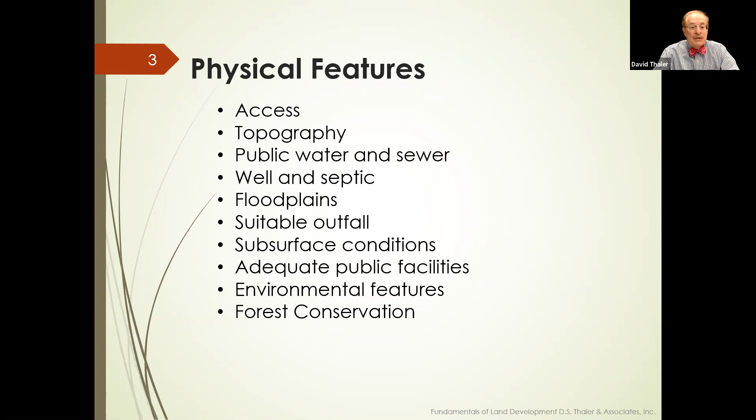Now we will continue to use the Helfrich property here in Woodlawn near our office as a case study, much like we did last week. It's a very simple piece of property, but it has some interesting lessons associated with it. And you'll recall it's 13 acres. It's a rental townhouse community, but we're going to analyze it as if it were for sale. Now really the first issue to consider in any land development project is access, which is a fundamental component of whether land is developable.

While it's extremely unusual to find a property that's completely landlocked, that does not mean that access for development purposes can always be provided. The existing access to a parcel may be too narrow, it may be an easement or a prescriptive right instead of a fee, or it may be unsuitably located.

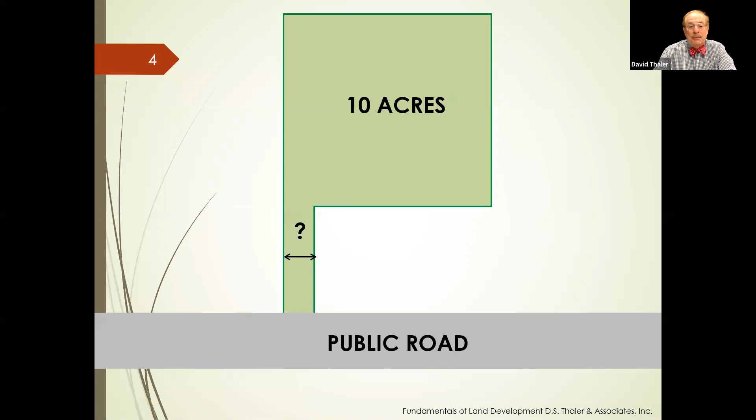In order to provide access to lots, in most cases a public road must be constructed and dedicated, though occasionally development upon private roads in certain jurisdictions is sometimes permitted. Most jurisdictions require a minimum right-of-way width of at least 40 to 60 feet, some even more for public roads, but often there must be additional property available for the grading of supporting slopes.

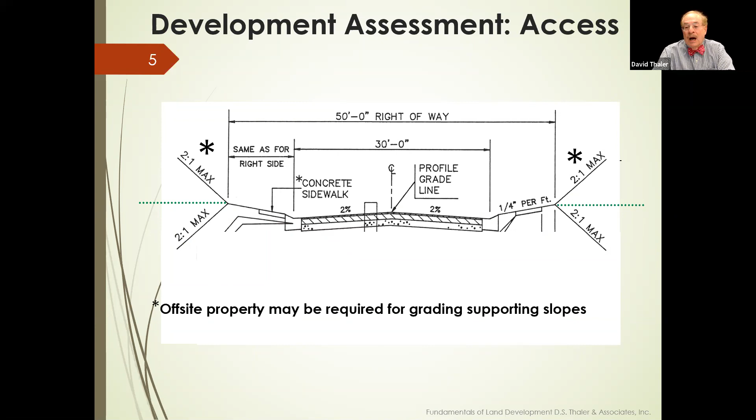If an access of sufficient width cannot be provided, the property may be unable to be developed. And while the public has the right of eminent domain using its condemnation power, the public cannot acquire property for private uses. Therefore, if grading rights on offsite property cannot be obtained, then a property may not be able to be developed.

The transportation article of the Annotated Code of Maryland grants the State Highway Administration control over access upon state highways. Except for restricted access highways, the state cannot totally prohibit access from a state road to a property, but it can control the location and type of entrance. That is, it may only allow a limited access entrance.

The access requirements of the state, as well as the local jurisdiction, can severely impact the development potential and therefore the value of the property. If the State Highway Administration finds the access onto a state highway unacceptable for a full entrance, it may require an entrance which allows only limited turning movements, such as a right turn in or a right turn out.

Such an entrance can be devastating for commercial properties. If you're a Dunkin' Donuts, for instance, you want to be on the going to work side of the road and not the coming home from work side. And it could be devastating for any property, for that matter, which requires access from more than one direction.

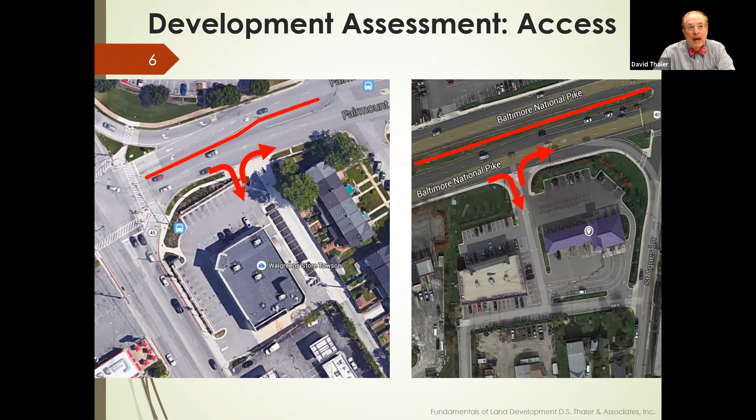That is, entrances should be 100 feet apart from each other if they're not directly opposite. That distance is necessary to prevent confusion as to who has the right of way when the entrances are opposing. In addition, entrance locations are also constrained by what is known as sight distance.

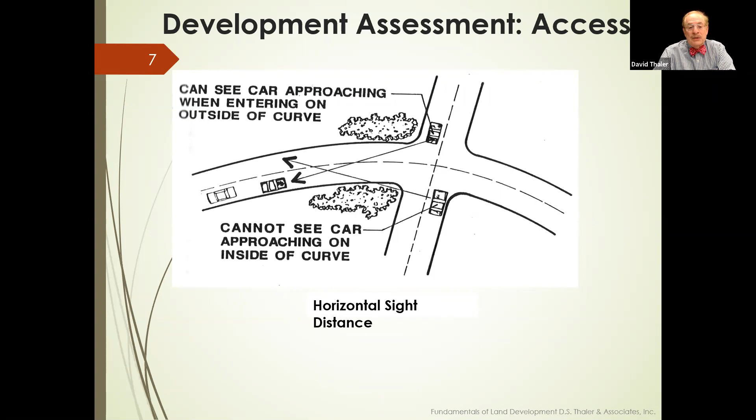That's S-I-G-H-T, not S-I-T-E. Sight distance may either be horizontal or vertical, and an entrance to a highway which is on the inside of a curve may limit the distance around the curve from which oncoming vehicles can be seen. The higher the design speed of the road, the greater the distance must be to provide for a safe entrance location.

Now, there is intersection sight distance and there is stopping sight distance. We usually consider intersection sight distance, which I just talked about, but stopping sight distance comes up, though that's too technical for today's talk and is the subject of another talk.

Likewise, there is another situation that is frequently encountered: entrances which are just over the crest of a hill do not have sufficient vertical sight distance to see traffic approaching from the far side of the hill. The higher the design speed of the road, the greater the vertical sight distance must be for a safe entrance location. In the vertical situation, it's best to be either at the crest of the hill or sufficiently away from the crest.

The two situations of which to be especially aware are when a property's entrance is either close to the crest of a hill or on the inside of a curve. It's possible, as we have hit before, that properties with extensive road frontage can be so affected by sight distance and other regulations that no safe entrance can be provided.

In that circumstance, the property could be undevelopable, or its development potential could be restricted, unless a suitable entrance location can be provided. Now, in Maryland, representatives of the State Highway Administration are assigned to local jurisdictions, and it's recommended that the SHA representatives be consulted and that they review the suitability of an entrance location prior to an investment decision.

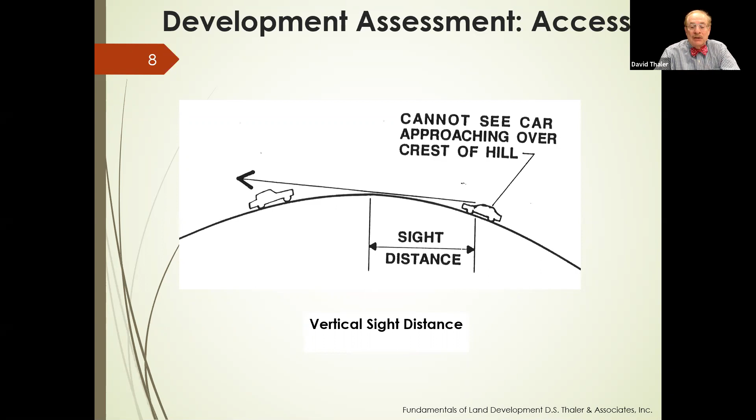As a very general rule, the sight distance is 100 plus 10 times the design speed of the road. So if, for instance, the road has a design speed of 35 miles an hour, the required sight distance would be on the order of 450 feet. Most jurisdictions, however, follow the AASHTO standards, the American Association of State Highway and Transportation Officials.

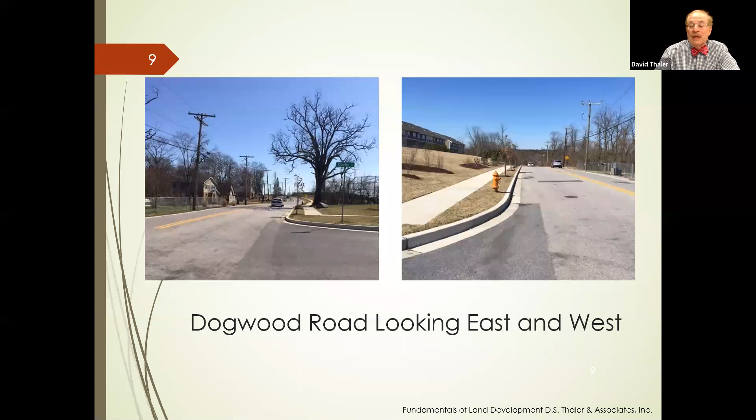Now, going to our example, the Helfrich property is located on Dogwood Road. The slide to the left is looking to the right coming out of the entrance, and the slide to the right is looking to the left coming out of the entrance. You can see that this is a pretty hilly road, but the crest of both hills are sufficiently far away from the entrance, so it would be safe to have a full, unrestricted entrance here. Even in an obvious case like this, it would still be best to have one of the county public works engineers come out and double check.

Now, the next element that is critical to determining development potential is topography.

Topographical maps and so-called GIS tiles are usually available through the individual jurisdictions, and very often GIS is now available on the internet. In areas where the maps or tiles are not available, USGS maps showing topography with large contour intervals can be used to develop an understanding of the existing topography on a property.

A property may have portions that are too steep to be properly served by roads or driveways, and areas that are too steep are difficult to build upon at best and may be completely unsuitable for construction. Existing site topography often guides the design location of proposed roads and improvements.

Normally roads must be graded at less than 10%, although the optimum grade for a road is usually between 2% and 8%, though there are exceptions. Grade, of course, is the change in elevation over a horizontal run expressed as a percent. 5 feet of rise along 100 feet of run, for example, is a 5% grade.

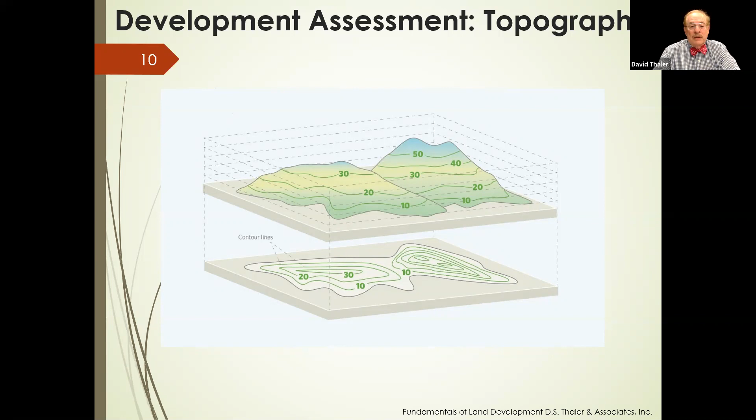Now, Helfrich, our example, is pretty flat. However, it does have a very interesting feature — a beautiful pond full of fish. I took the director of planning out here, and we caught quite a few fish. This would be very hard to appreciate just from the GIS; you would need to see it in the field.

And interestingly, even though it's a wonderful amenity, and we were able to save it, under then-existing county regulations, you couldn't count it towards your open space requirement because it's not dry, and you couldn't use it for stormwater management because the outfall and release rates weren't engineered. But we were a little bit unusually able to save this as an amenity.

Now, also on the Helfrich property, it is very flat, and it's so flat, it's suspiciously so, and it didn't smell right to me, and that raised a red flag, but we'll get to that in a few moments.

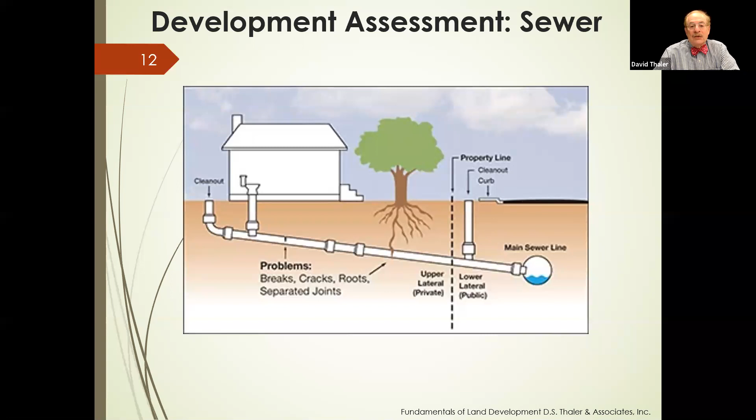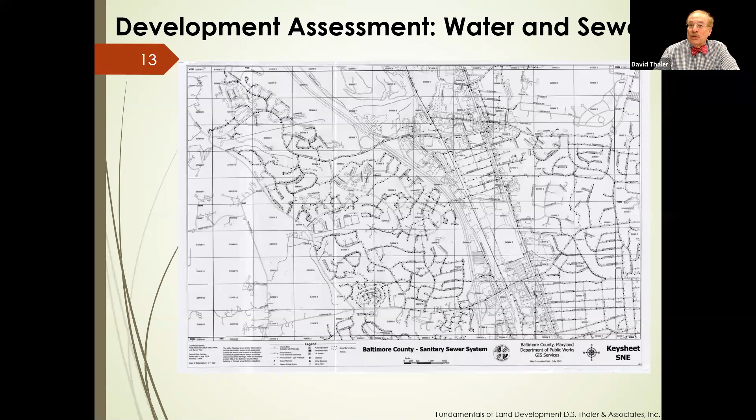Now, if the sewer is existing in your area, you must also determine if it's physically possible to extend the lines to the site. Sewerage usually flows by gravity, and therefore there must be sufficient fall between your site and the existing sewer for the system to really work. And in addition, there must be adequate right-of-way available for the construction of any required extensions.

Now, coming back to our Helfrich property, our case study, this one is a wee bit unusual. There is sewer really nearby. It's right at the top of the hill I showed you in the prior slide, but it's too high and the sewerage must be pumped. And in Baltimore County, there are two options: you could have a public pumping station or grinder pumps.

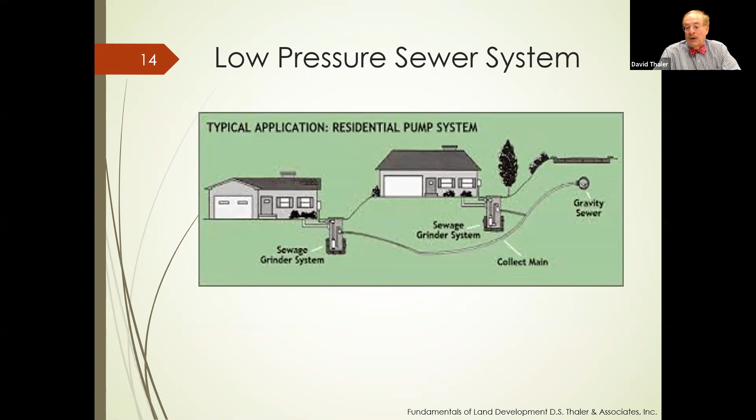Now, because these were actually rental townhomes, it would have been possible to install a private pumping station. A public pumping station would cost something on the order of $1 million, sometimes more, and is required, at least in Baltimore County, if there are more than 100 units using it. But for less than 100 units, the county will permit what are known as grinder pumps, which is the option we selected in this particular case.

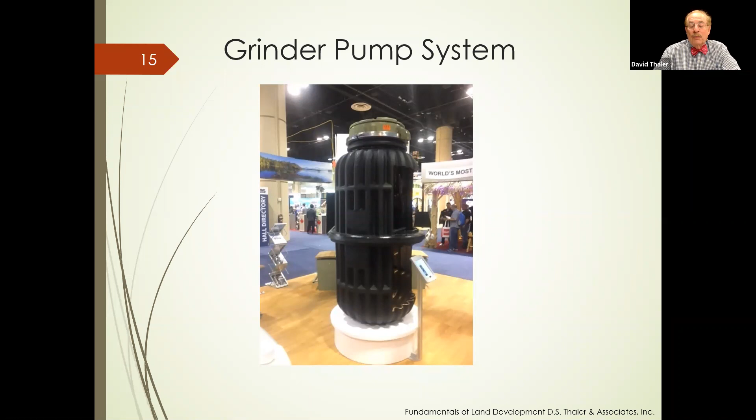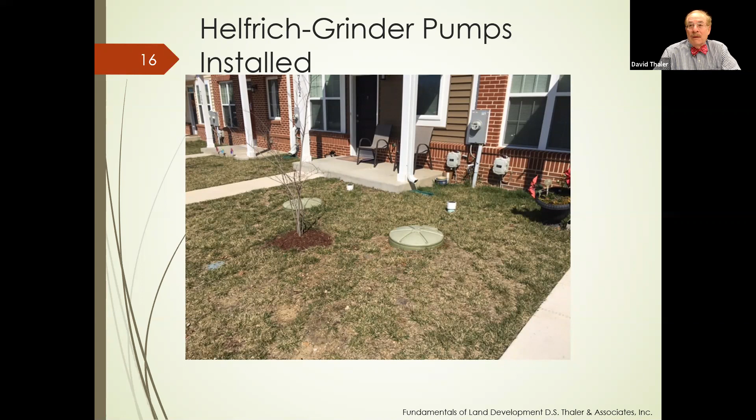They do change the financial relations between the developer and the builder, however, because the developer typically puts in the casing and the force main, and the builder ties in the pump to the house and installs the pump itself.

Now, the next element of important feasibility is water supply. Unlike sewer systems, water systems flow under pressure and not by gravity, and consequently, under most circumstances, water lines can be extended with little concern for grade.

Again, county records or GIS can help determine if water lines are proximate to your property, but I always like to visit the site and check for fire hydrants. If you don't take anything else away from this talk, I think it's very important in doing a feasibility study to get all the public records and then physically go out to the site, and you will find errors and things that aren't on the records.

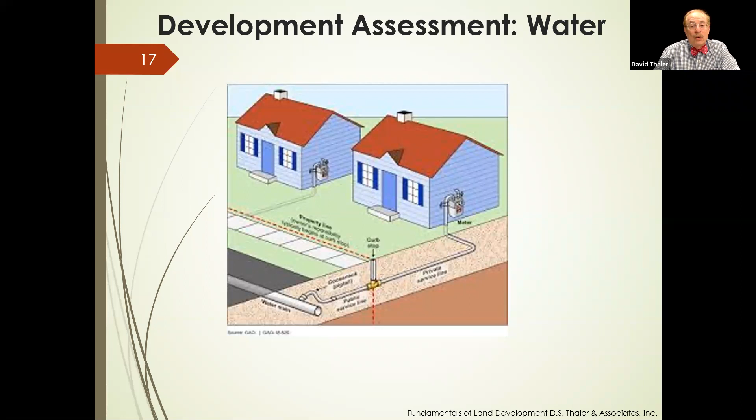Now, water lines have their own problem associated with them because they're, especially the older ones, generally made of cast iron, and they tend to rust or tuberculate with age. It's very common for old water lines after 50 years or so to have limited flow capacity. And so you conduct what's called a fire flow test to determine if the water line has sufficient flow for a particular development. Multifamily developments require more water pressure and more water volume than do single family.

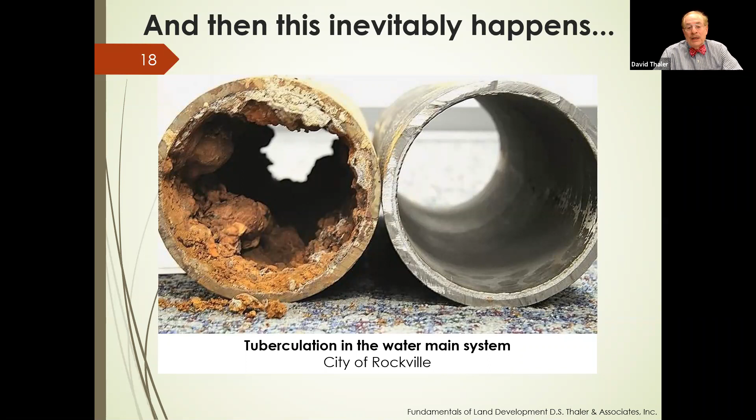Now, occasionally there are entire areas which are subject to low water pressure, and these areas are generally mapped in the local public works department, and development may be prohibited or restricted until water service can be made adequate. And in order to physically have a property with public water and sewerage, it must be properly designated within the state-approved master water and sewerage plan, and in the Baltimore region, within the metropolitan district.

Areas not served by public water and sewer typically utilize well and septic systems. In the coastal plain of Maryland, water yields are typically very high. However, in the Piedmont area, there are many geological formations which produce low water yields. It's possible a site may not yield a producing well at all. We've had lots with a dozen dry holes on them, for example.

An examination of the geological maps prepared by the Maryland Geological Survey can provide some insight into the geological state of the property, but ultimately a well test and the records at the county health department are the only things that will really determine an actual yield.

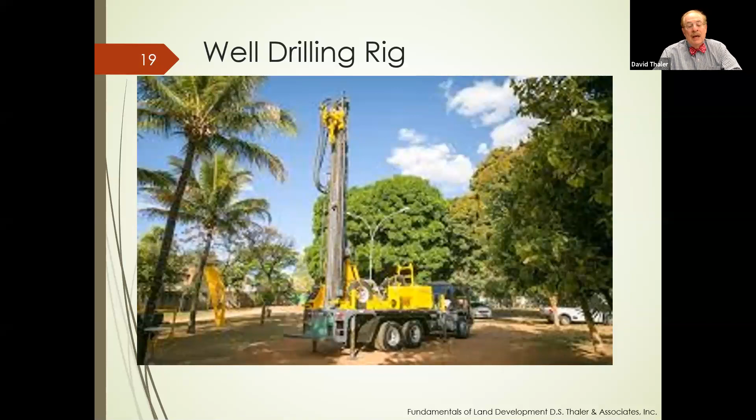Likewise, percolation tests should be taken to determine the suitability of a site for septic systems. A percolation test is conducted below the level of the septic tank. A hole is dug, water is poured into it, and the rate of outflow is measured. The percolation rate must be neither too fast, or the soil provides no filtrative capacity, nor too slow, or the septic tank will overflow, for the property to be deemed suitable.

Properties at low elevations near streams or tidal areas, or which have very poor drainage, will not be suitable for septic systems. Every county in the state has a health department responsible for the approval of building sites.

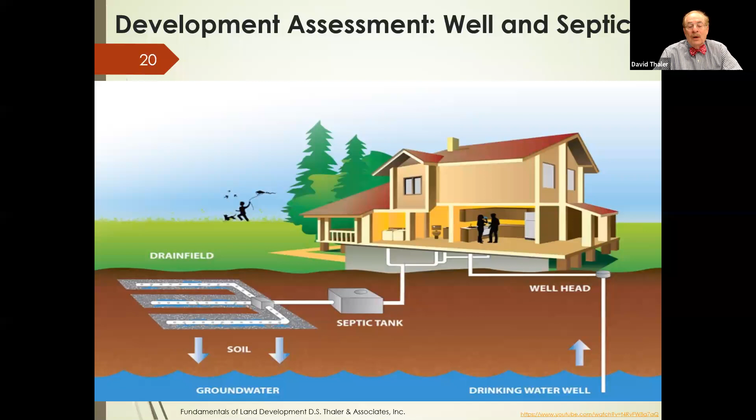Percolation tests must be taken and approved prior to the recordation of a plat. The Sustainable Growth and Agricultural Preservation Act of 2012, relatively new Maryland legislation, severely limits the use of septic tanks, and when they are permitted, they must use the best available technology, which is considerably more expensive than septic tanks without that technology.

The next element to consider is watercourses and floodplains. A stream may be a very attractive feature for development from a marketing point of view, but with every stream there's typically an associated floodplain, which is the area inundated in a given rainstorm. Floodplains are regulated, and largely all construction is prohibited within the 100-year floodplain, which is typically the standard storm.

The state of Maryland requires a permit for construction in most floodplains and will issue the permit if the pre-development hydraulic characteristics are maintained, but that's very difficult to get. Even if floodplains were not regulated, construction in them is extremely ill-advised, especially with global warming, because any improvement within the floodplain is at risk of inundation.

The 100-year storm is currently the accepted design storm, and it refers statistically to the storm which has a 1% chance of occurring in any given year. This statistical relationship also applies to other storm frequencies. For instance, a 10-year storm has a 10% chance of occurring in any given year, and a 2-year storm has a 50% chance of occurring in any given year.

Civil engineers and hydrologists use computer modeling to determine the floodplain. The amount of runoff at any given point is a function of several factors, including the drainage area coming to the point, the land use characteristics—how much of the site is grassy, forested, or impervious—and the length and slope of the contributing channel, known as the time of concentration, from the highest point in the drainage area to the lowest point. The shorter the distance and the steeper the slopes, the greater the amount of runoff generated in a given storm.

Although only an engineering study can compute the precise location of the floodplain, the Federal Insurance Administration (FIA) of FEMA, the Federal Emergency Management Agency, publishes a series of flood maps which are readily available and give an indication of the major areas which are flood prone and within floodplains. Although the FEMA maps identify major floodplains with pretty good accuracy, they aren't so accurate with smaller tributaries and may not even map the smaller floodplains. So only an engineered floodplain study can really correctly determine floodplain limits and elevations.

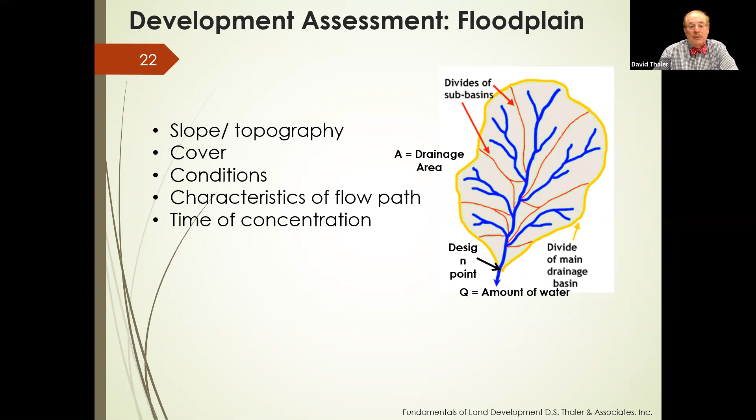No matter how attractive a property may look on the surface, its subsurface conditions may render it inappropriate for development.

Soil maps, which identify various soils and their development limitations, are available from the USDA Natural Resources Conservation Service. Now, a site may be underlain by impenetrable rock or have an extremely high water table, or it may have been used for dumping. This is extremely common.

Subsurface explorations, either soil borings or test pits, should always be undertaken to determine the nature and suitability of the substrata. Borings can be prepared or test pits excavated with a backhoe at strategic locations very economically, but more than one developer has purchased property to discover trash buried beneath the surface.

Now, as I alluded to before, Helfrich was an old country club, and there's a series of soccer fields on it, and it just didn't look right to me. After as much time as I've spent in this business, I can just walk a site and sometimes things just don't feel right. This site was in a hilly area and it just looked too flat.

So we went out and we got a backhoe, $60 an hour or something like that, and we started digging some test pits. And sure enough, it was underlain by trash and rubble. Apparently, when one of the highways was being built, the owner of the property allowed them to dump the rubble on the site, then covered it up, made a very attractive field with it.

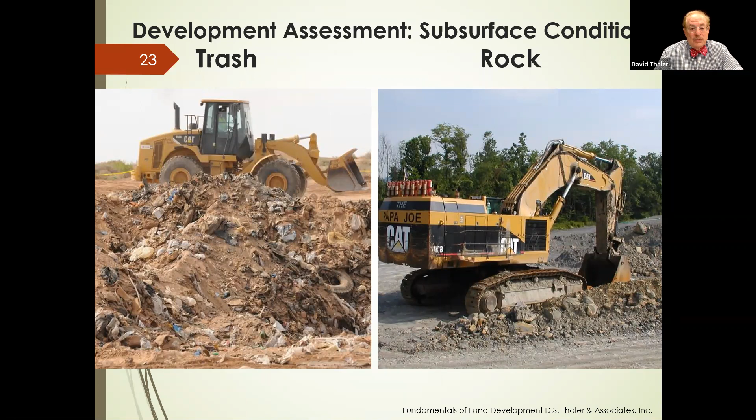But had the developer bought this property not knowing the trash was there, he would have been in for a big financial surprise, especially if that had been considered toxic and hazardous waste or had petroleum products associated with it. Now, the next element to talk about is suitable outfall.

Every site must discharge its water in a way that does not damage the downstream property. And in order to do so, it needs what is termed a suitable outfall, which is very hard to define. But as Supreme Court Justice Potter Stewart once said in a very different context, you know it when you see it. He was talking about pornography, incidentally. A suitable outfall, you know it when you see it.

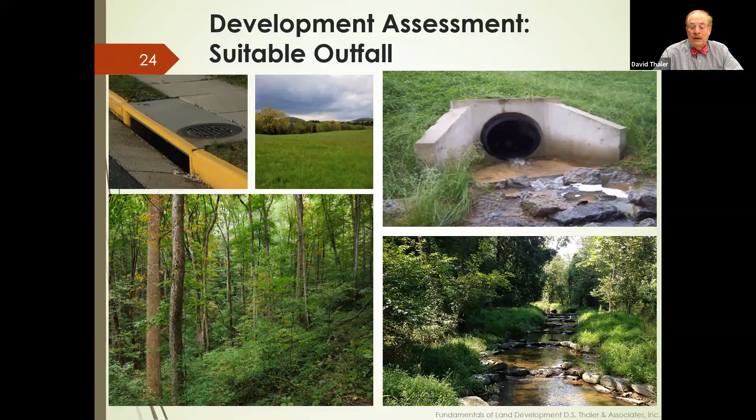The next element is adequate public facilities, which many jurisdictions in Maryland have, Baltimore County, Anne Arundel County, and many others. These prohibit development in those areas where certain public facilities are inadequate. In Baltimore County, the County Council adopts maps of the basic services in the fall of every year. The services they map are traffic, sewage, water, and schools. Areas of deficient services are mapped and development is prohibited in them for the duration of the deficiency.

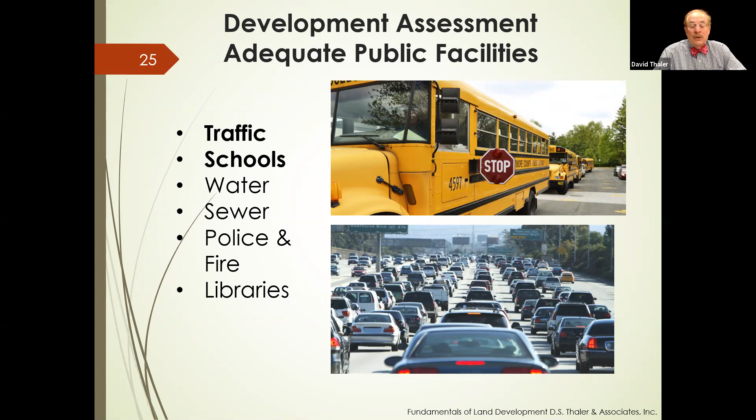In Anne Arundel County, a development proposal must also have adequate public facilities, including schools, traffic, water and sewer, and police and fire. A development in an area of inadequate facilities can proceed only if the developer corrects the inadequacy. Now, Montgomery County, interestingly, has had APFO, adequate facilities, for years, and APFO-driven moratoria, but just eliminated its moratoria for overcrowded schools, having found that it didn't work and didn't solve their overcrowded school problem. But adequate facilities are something to be considered in every jurisdiction and are usually well mapped.

The next element is critical area. The Maryland legislature adopted Section 8-1801, the critical area law, and this divided areas in the state into three types of development areas: intensely developed areas, IDA, limited development areas, LDA, and resource conservation areas. Suffice it to say that there are very difficult restrictions in each of these areas.

The critical area is the area within 1,000 feet of the Chesapeake Bay or its major tributaries, and it is possible to increase the IDA and LDA, the areas which have some development potential to them, through a process called obtaining growth allocation, but that's difficult and a talk for another day.

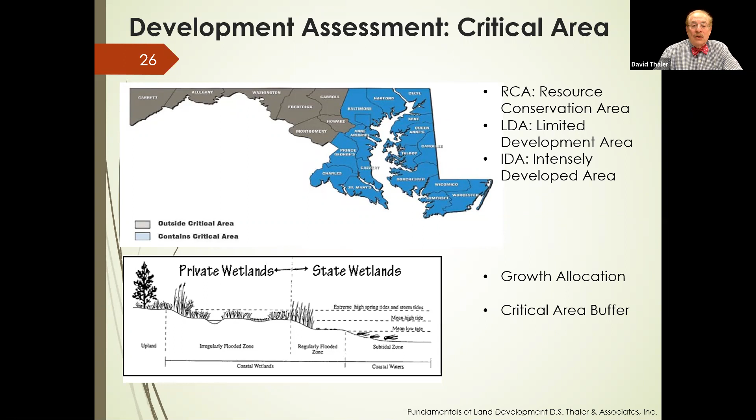I'd like to talk about some environmental issues next. We're going to have on May 18th Michael Powell, a superb environmental lawyer from Gordon Feinblatt, really dig deep into this.

But in the context of feasibility, I want to talk about some environmental issues. The first are toxic and hazardous waste, and there is a law, the Comprehensive Environmental Response Compensation and Liability Act, known as CERCLA, better known as Superfund, which imposes severe liabilities and risk upon real estate owners. CERCLA defines a long list of toxic and hazardous waste, and the act applies to anyone with a contractual relationship to a property. That is, you may not have contaminated property, but if you buy a contaminated property, you are responsible for its cleanup, which can be extremely expensive.

In order to protect property purchasers, a system has evolved, and it is very important to have a phase one environmental assessment performed by a competent environmental consultant. A phase one includes the development history of the property, visual and other analysis to determine if it's likely that toxic and hazardous waste are present. Then if you do a phase one, under the law a property owner can assert the phase one as a defense should environmental liability later arise.

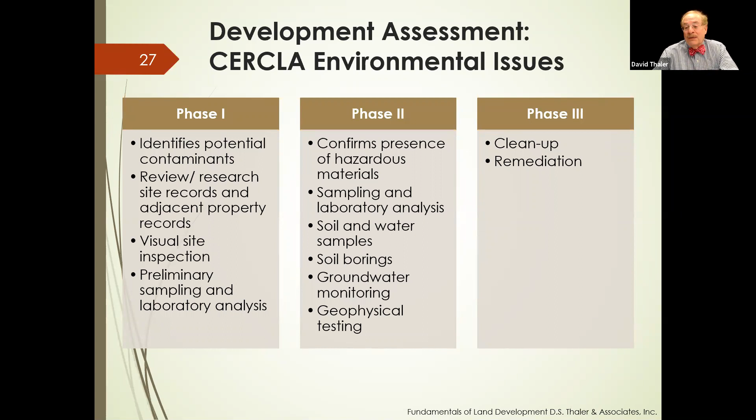In the case of contaminated property, which we call brownfields, there is the availability of the VCP, the Voluntary Cleanup Program at MDE, and that is available, but very expensive and not typically for the development property that we deal with.

Now, the next element to consider is forest conservation. Maryland and various local jurisdictions have passed laws requiring forest conservation. Forest conservation requires first a forest stand delineation, a study to determine the extent and nature of forest resources, and the State Forest Conservation Act maintains that a certain percentage of forests be maintained. This is known as a threshold, and there is a mitigation requirement should clearing be proposed below that threshold.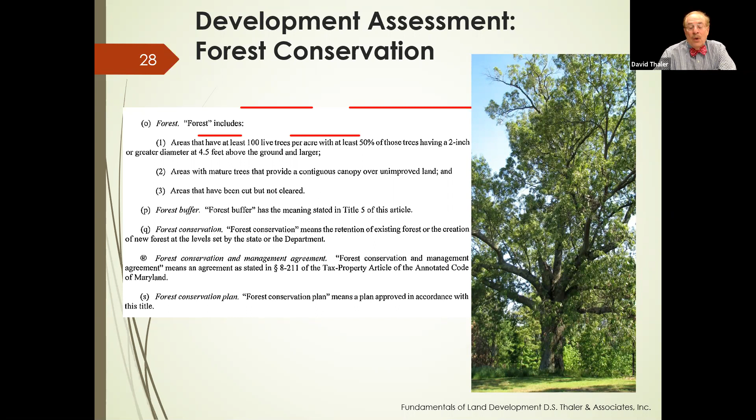There is also what's known as an afforestation requirement, which requires a minimum amount of forest even where there is none initially. In addition, some jurisdictions like Baltimore County have specimen tree ordinances which require the protection of trees of a certain size and sometimes require what Baltimore County calls special variances before their removal.

I want to talk a little bit about wetlands. Wetlands are considered to be highly sensitive and valuable environmental resources. They're classified as tidal or riparian and non-tidal. Typically, development projects encounter riparian or non-tidal wetlands. The Federal Clean Water Act, as well as state and local laws, protect wetlands and provide for very severe penalties if they are disturbed.

Prior to undertaking any development project, if the presence of wetlands is at all suspected, it's highly recommended that a qualified consultant perform a wetlands delineation. And even if the wetlands are not suspected, it's still advisable to have a cursory review.

Under federal regulations, wetlands must have three characteristics, what they call diagnostic parameters: hydrology, hydrophytic vegetation, and hydric soils. These are basically circular definitions. It simply more or less means wet soil. Hydrology means that water is close to the surface for at least 2 weeks during the growing season. There are some types of plants which like to grow, and some which will only grow, in wet areas. These become diagnostic parameters for wetlands, and these are called hydrophytic plants.

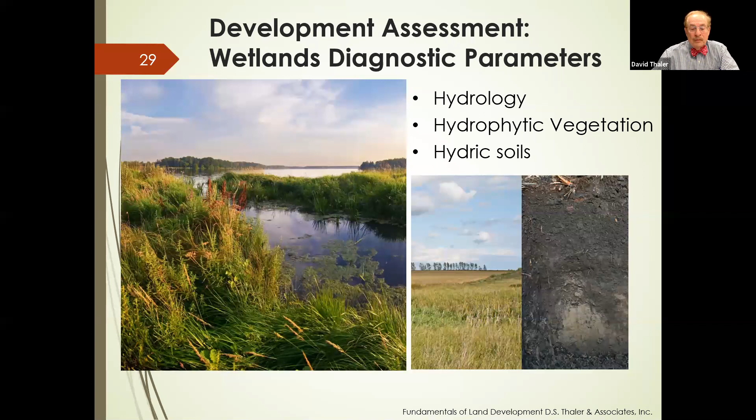Another element to be considered are historical issues, and these can radically affect property development. Among these are grave sites. Historically, backyard burials or burials in small family plots were very common, and these are often unmarked and undocumented. Now, disturbance of graves is really a bad idea and can result in hefty penalties and must be avoided.

But I'll tell you, I've seen the movie Poltergeist, and really, you don't want to mess with the graves. And if you have graves, you want to find them on site before the backhoe operator does to make sure that they are properly protected.

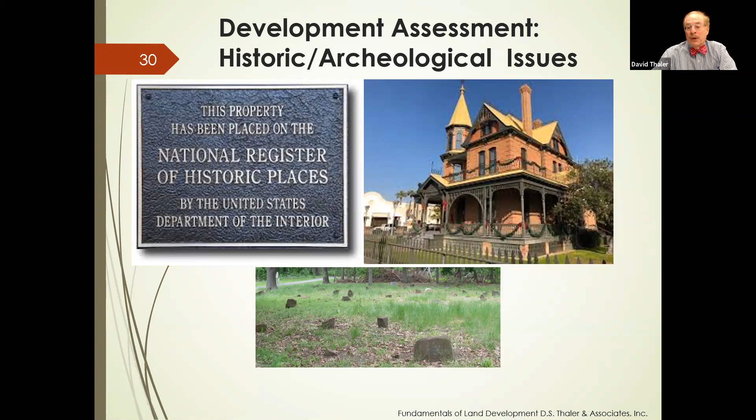Now, additionally, some counties, like Anne Arundel, require an archaeological investigation, and many counties have historic preservation laws which prohibit development on historic sites, generally but not always those that are more than 50 years old. And sometimes development will be prohibited on historic settings as well. Now, most jurisdictions, as well as the state of Maryland, maintain an inventory of historic sites, which should be consulted prior to property purchase and development.

Now, the next issue are title issues. We are encountering these much more frequently. I think that title reports are going back further now than they used to. I think they used to stop at 50 years, but we're coming up with title issues much more frequently than they did. And the first variety is covenants.

Now, it's quite common for a property to be restricted by the use of a covenant. For instance, a covenant may say that future lots have to be a certain minimum size, or may prohibit certain types of construction. Now, covenants are extremely difficult to remove, and it's not uncommon, especially in the Baltimore region, to find covenants against certain religious or racial groups. Those types of covenants, however, are no longer valid.

Another issue we frequently had, very dangerous, are old roads or paper streets. These are more common than you would imagine. And back in the day, surveyors would subdivide property and create streets wherever. Very often they didn't get developed.

But the problem is that every property owner which fronts on the paper street has a non-exclusive right to use that road. So it's very important to know where these paper streets are, even though they may not be visible in the field, and to avoid developing on them, because if a lawsuit is filed, it's been known for the judge to have the house removed.

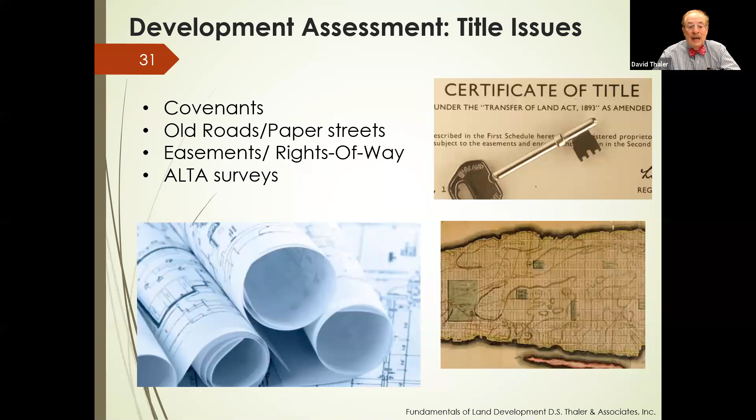It is very important to get good and merchantable title, and therefore I can't recommend enough that a title search be done, not when you close on the property, but as part of the feasibility of the property to see if there are any title issues that would affect your development.

Now, one other unique item to the Helfrich property is that there was a cell tower monopole in the middle of the property. This was obvious, it was here, but it affected the development. Now, monopoles and cell towers are designed not to tip over their whole length. They're designed, when they break, to break in the middle. So they have a designed fall zone. So we had to calculate that designed fall zone and make sure that no houses were within the distance that wasn't safe from the monopole.

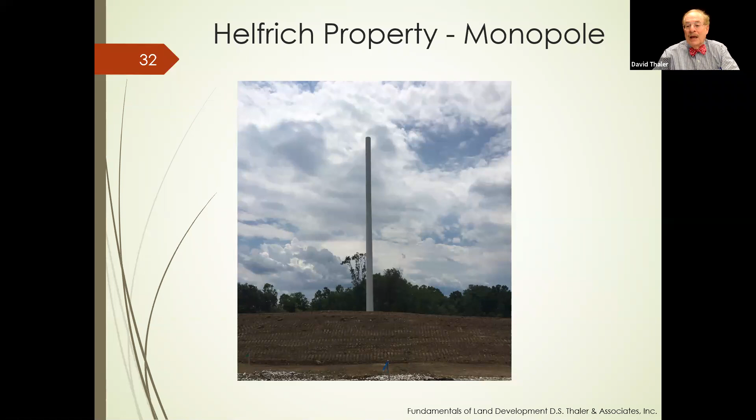And then what we like to do is prepare, during the feasibility, a sort of plat of existing conditions. This is the Helfrich property. It shows the zoning, the topo, the boundary, the wetlands, the forest buffer, the steep slopes, everything that you can think of. I like to put it in a graphic so that we can understand what the issues are and how we're going to deal with them. And then that, of course, leads to the final layout.

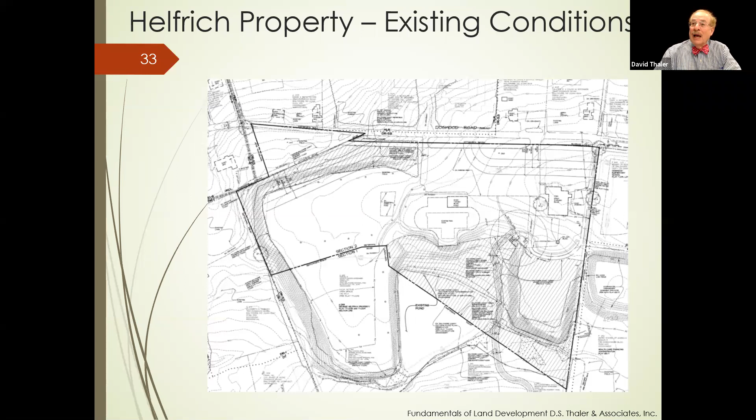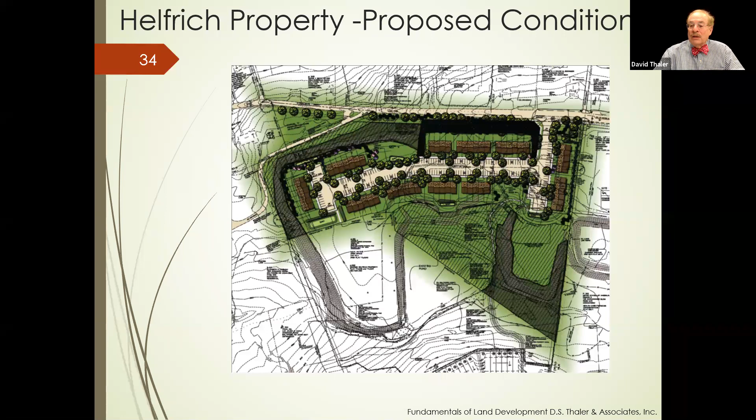I want to talk briefly about the approval process.

Now, when I started work in Pennsylvania, which has more than 2,000 boroughs and townships, I was surprised at how different all the subdivision approval processes seemed to be. But it seemed as if there was some hidden spine to them, because they were all different, but they were all very similar. And it took me a while to figure out why.

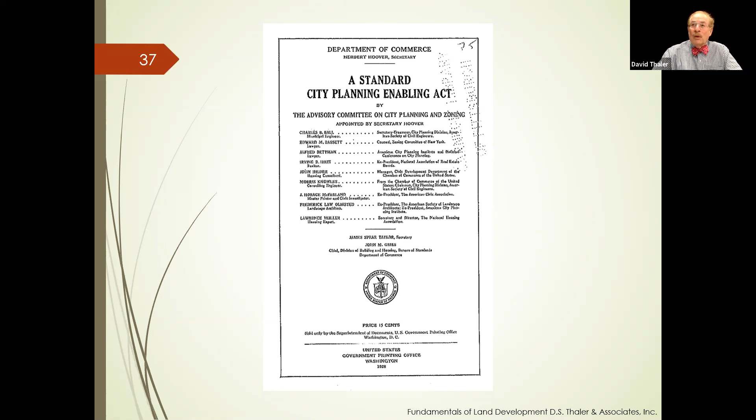And that's because they're all based on this Standard City Planning Enabling Act, which was a model ordinance promulgated by the US Department of Commerce, and it's been adopted in one form or another by almost every American jurisdiction.

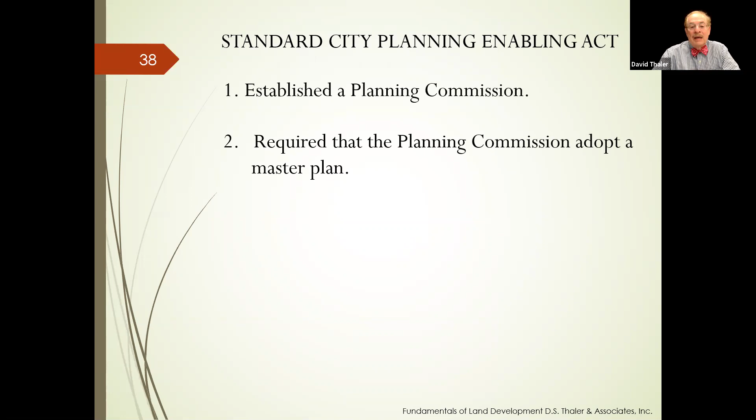Now, the act had several elements to it. First of all, it established a planning commission. It required that the planning commission make and adopt a master plan, and it prohibited the opening of any public roads until their location had been approved by the commission, and it made the subdivision of property illegal without planning commission approval.

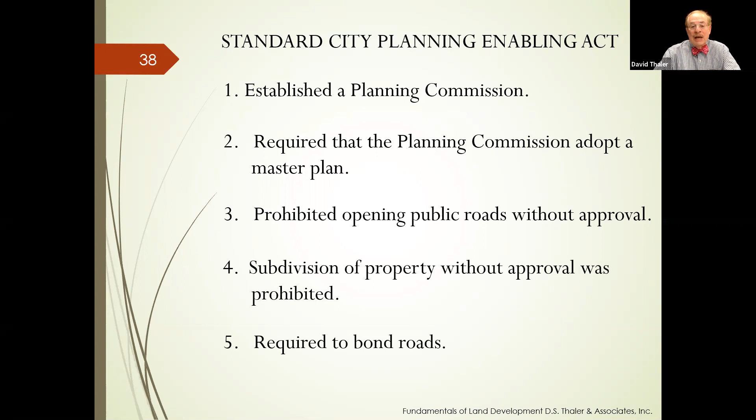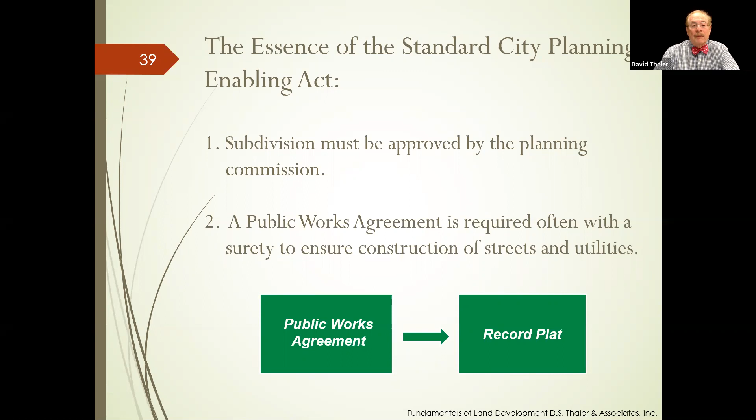Finally, the subdivider was required to bond or otherwise guarantee the construction of the streets, usually with a contract, which came to be known as a public works agreement. And so in its very simplest form, the subdivision process really only consists of two real steps: one is approval by the Planning Commission, and the other is a public works agreement. But from that very simple framework has grown an extremely complex, convoluted process that in some jurisdictions contains more than 100 steps and the involvement of dozens of agencies.

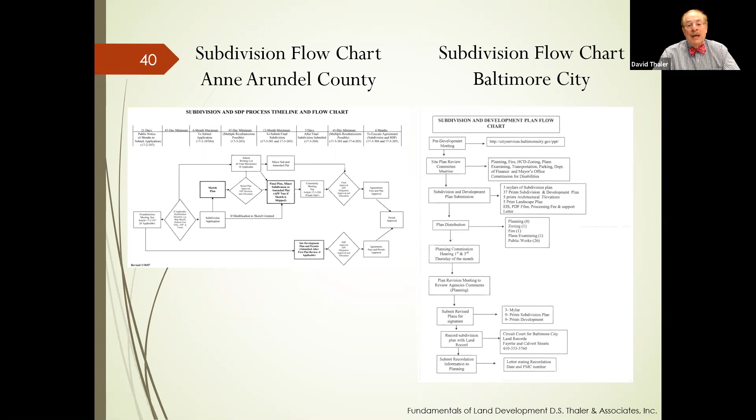Now, here on the slide are the Anne Arundel County and the Baltimore City, somewhat oversimplified flowcharts. Often the authority of the Planning Commission is delegated to the staff, usually the Director of Planning. And because it would be extremely time consuming to submit all the engineering at once for final approval, a multi-step process has evolved. In many jurisdictions, Howard County for example, it's a 3-step process: sketch and final, with an optional pre-sketch submittal. Now, in this region, Baltimore County has arguably the most sophisticated process, and its procedures are often adopted by other jurisdictions. So I'd like to review that one in a little more detail.

Baltimore County divides its process into 2 phases, however our office adds a phase to that we call pre-phase 1. Pre-phase 1 includes gathering all the physical elements and constraints about the property. Generally we do boundary and topographical surveys - we like to do that right up front, even though that's not always necessary. It's possible to work from the GIS, but it sure saves a lot of trouble later. We do the wetland analysis, the forest stand delineation, the floodplain, and other environmental studies so that we completely understand and seek approval where necessary of the constraints of the property prior to entering the development process.

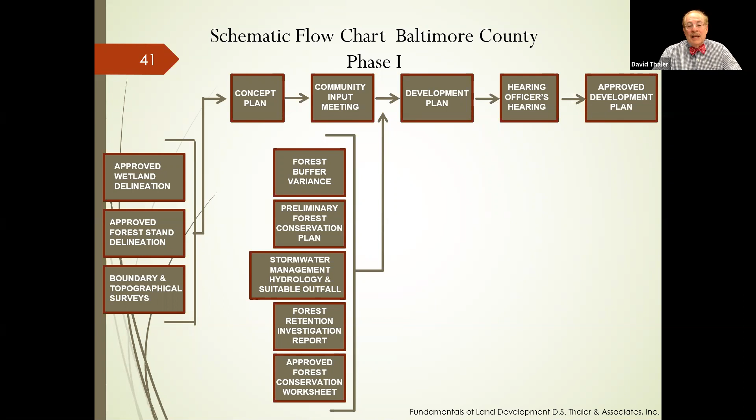Next in Baltimore County is the phase 1 process, and the first step is the concept plan. A concept plan is simply a sketch of what you want to do. You send out copies, and then you hold a community input meeting.

At the community input meeting, anyone may ask questions and make comments, but needless to say, sometimes these meetings get quite heated. And on more than one occasion I've been asked to step out to the parking lot and settle the issue like a gentleman. I tend to decline those.

No matter where the proposed development is, the issues are often similar. Neighbors tend to voice strong concerns regarding traffic, overcrowded schools, too much density, and any change in their perceived character of the neighborhood, especially if the proposal is for less expensive housing than their own.

Now, although widely misunderstood, the CIM has several not so obvious but very important purposes. First, the fact that certified letters go out to neighbors who may never have spoken together creates a sense of urgency. And at this meeting, a wide variety of concerns and anxieties are usually expressed. Most have nothing to do with the development proposal, but a sympathetic, empathetic ear and an opportunity simply to be heard tends to reduce the opposition.

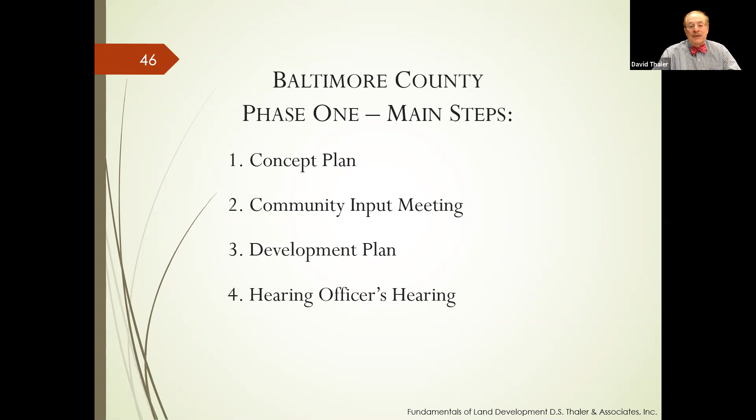Then phase two engineering begins. This is the extremely detailed engineering design and includes construction drawings for stormwater management, sediment control, roads and utilities, etc. There are many required construction drawings, but the process at this stage is generally very businesslike. The politics have really pretty well been dealt with earlier.

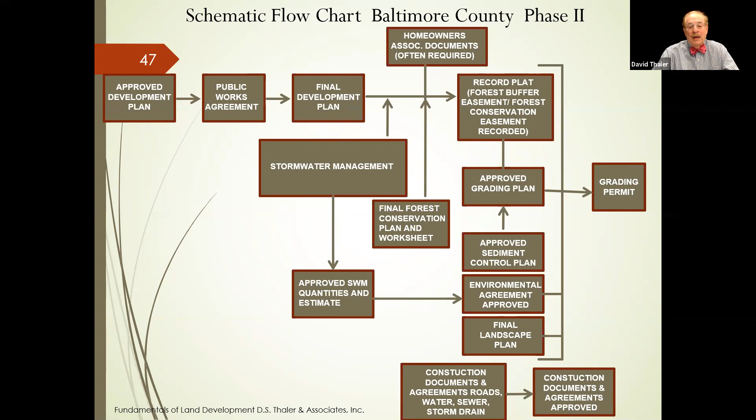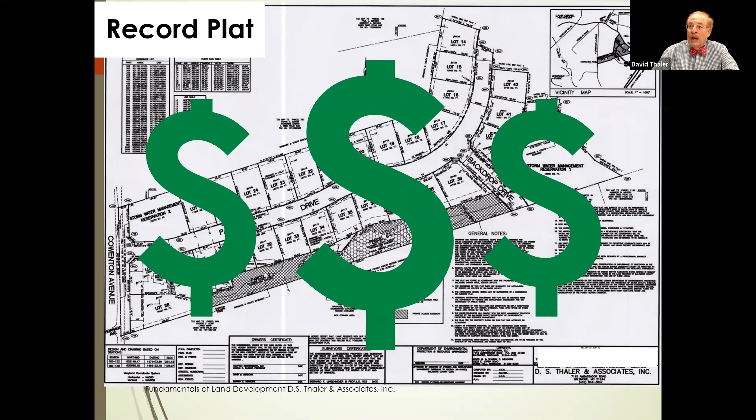Now, finally, I want to leave you with one final thought: the secret of success in land development that I learned as a very young engineer. There was a lady engineer in Baltimore County, Kath Warfield, Steve Warfield's mother, an MBIA member. She was one of the very few female engineers, and she was kind of very maternal. One day I went in with some bonehead proposal to the director of public works and the chief engineer in Baltimore County. I was right out of college and full of beans.

They basically said, this is the dumbest idea we ever heard, don't darken my door again. And I walked out of the office very dejected. And Mrs. Warfield put her arm around me and said, son, don't you know the first law of development? And I said, no, Mrs. Warfield, what's the first law of development? And she said, everything is developable.

And I leave you with that thought. Happy developing, and I'll see you next week.